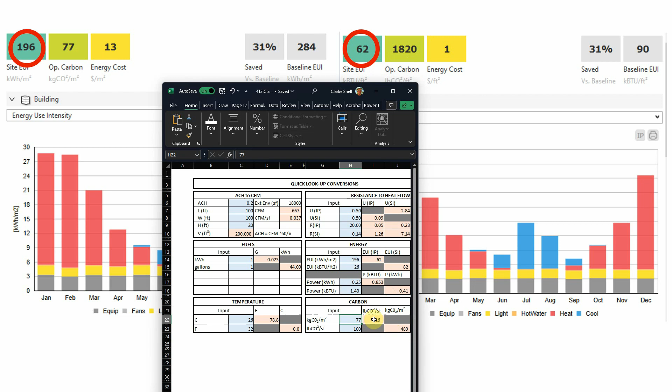Kilograms to pounds is, we're multiplying here by 2.2 in the numerator, and then meter squared to foot squared is 10.76 times to get the feet squared. That's in the denominator, so it's like 0.2 or something, but it's a smaller number. All right, so we need to be conscious of that.

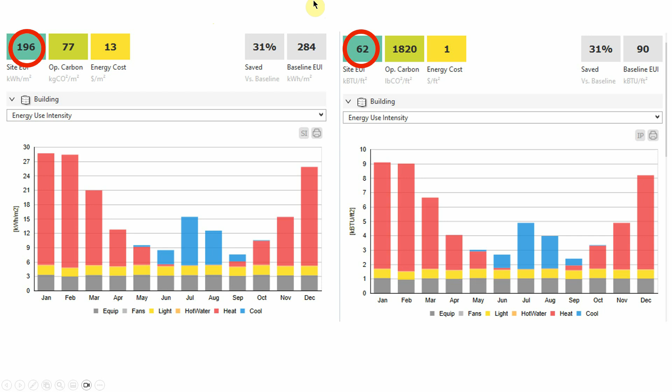And so then what I'm saying is we should just use the metric. And I've created a spreadsheet that will convert for us, so it should be straightforward. But just remember, don't use this value. And there's another value I found like that.

So we'll just have to keep our eyes open. Okay, so let me go back to the slides.

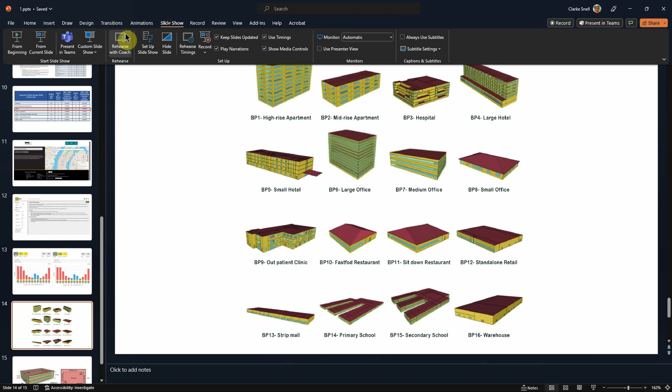So what's our benchmark for this? There's a new law in New York City called Local Law 97. I've mentioned it before, and it creates very stringent carbon emission standards for any building. We'll talk about the specifics in a second, but let's remind ourselves why carbon.

Unless you've been hiding under a rock for a while, it's climate change, and there is no debate about it. And it's pretty well established that a lot of this crazy weather is climate change connected. But the basic science is so straightforward that it's kind of laughable that there's people that might still debate it. I think they're all politically motivated.

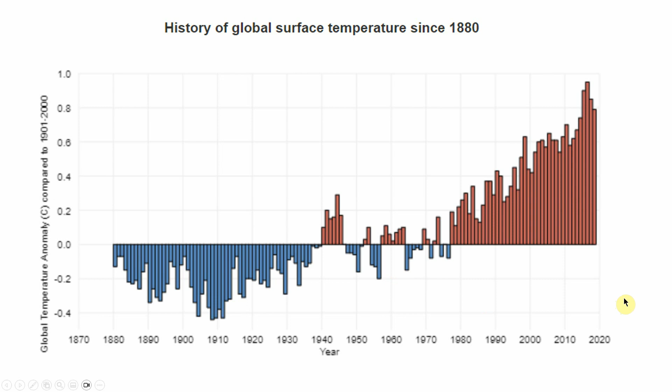There's thousands of peer-reviewed papers we can read, but this is why we have this law, and you can't disagree with it anymore because it's just the law. I don't mean you, but I just mean this is just what we have to do. This is the standard of care now. This is legal design. So this is the law, Local Law 97.

Basically, what it says is that any building in New York City that is 25,000 square feet or more, and that means that's already built also. So if you own a building and it's just sitting there, and it's 25,000 square feet or more, you fall under Local Law 97, which starts next year in 2024. And there are carbon emissions limits. So TCO2e per square foot is tons of carbon dioxide equivalent per square foot.

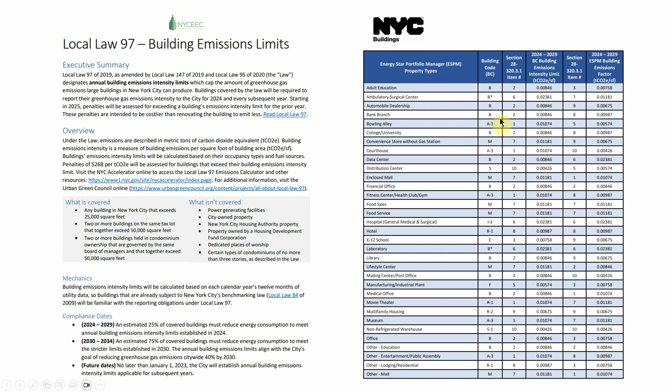An equivalent is taking into consideration other greenhouse gases, like methane, for example, which has a much higher effect on temperature than carbon dioxide, but we're putting so much more carbon dioxide into the atmosphere. It's really the main one we have to worry about. If we don't fix the carbon issue, the rest of it's moot. And then there's two parts to this. Well, three parts really. One is, so we have it in the building code now.

I'm not sure why my mouse is locking up. It's always the way, right?

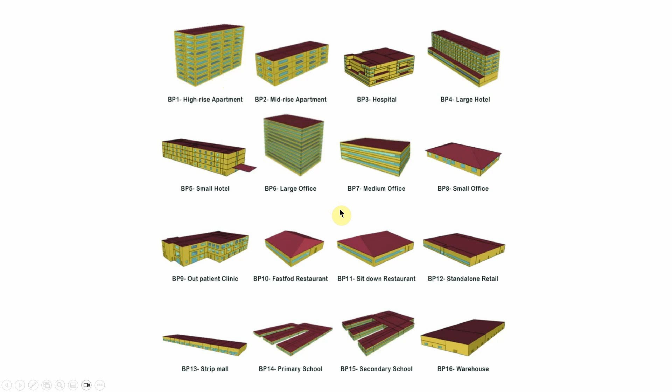We have emission intensity limits per square foot based on building types. And these building types are those DOE building types that we discussed at one point in these videos. We've been dealing with the medium office for the models that I've been giving as an example. I also did a mid-rise apartment building. We were dealing with one apartment in a mid-rise apartment building. But anyway, so these are the benchmark.

Actually, I'm going to confuse you there. Those are the DOE prototypes, and they're represented in this column. If you were using the Energy Star Portfolio Manager website and tool, you would have a different set of values than what we're going to use.

We're going to use what's straight out of this document, which I'll share with you. For example, the office we've been doing uses the DOE categories and code categories, which is what we're used to in terms of egress. A3 is a museum, B is an office. For what I'm doing right now, I'm going to use the B number.

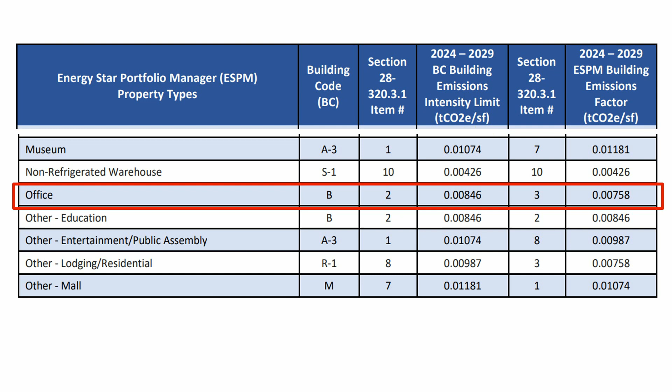It's 0.00846 tons of carbon equivalent per square foot of building space. So I have another page on my spreadsheet with Local Law 97 inputs. Let's talk about this briefly.

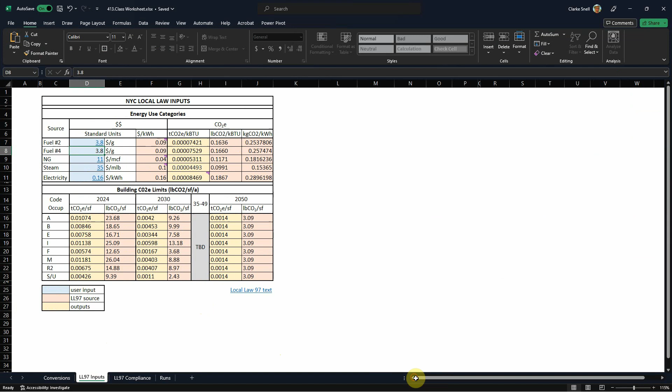First, we have the energy use categories: fuel oil number 2 and 4 as examples, which are common in certain types of buildings. Natural gas is the NG, steam would be district steam, and electricity. These are used both for plug loads, like whatever you plug into an outlet, but also heating, cooling, and hot water.

We obviously want to keep track of the cost of these things, and we can do that as part of this calculation. But the other thing is that each of these fuel types has a different carbon equivalent, essentially a calculated amount of carbon per unit of energy, measured in kilowatt hours or kilobtus.

Why is that? Electricity, for certain reasons, we're trying to switch over to more, partly because we can make it with solar photovoltaic power, which is very low carbon. But this energy source has a downside if produced centrally at a power plant, because there's a lot of energy loss getting it to the site—you're often burning coal to turn a steam turbine to produce electricity, and there's a lot of friction and other losses in that production process.

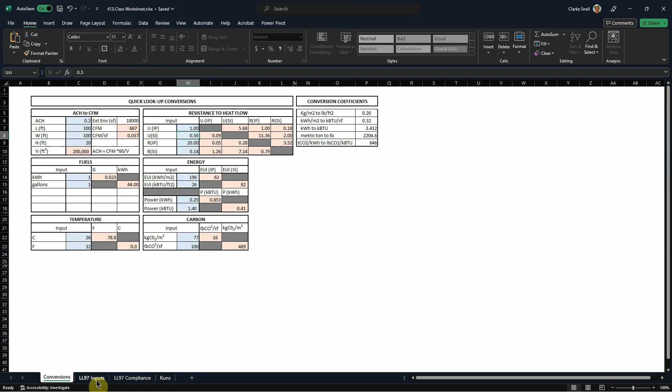Even if they aren't locked, the idea is I'm color coding: blue is where inputs go, yellow are outputs, and orange is sourced from the code. It's really very straightforward—you're just plugging in a couple of numbers, but I wanted to give you the background. We have to identify the fuel source so we know how much carbon it has per unit of energy.

Then we have different allowances for carbon per square foot based on occupancy type. For example, a museum has a higher use allowance than a business. This again is in tons of carbon per square foot.

And finally, the standard is going to become more and more stringent as we move forward towards 2050. Essentially in 2050, the goal is to be carbon neutral. So we can design a building in 2024 that meets the requirements for 2024, but it would fail in 2030 and 2050. We have to be thinking about the future as we're designing now.

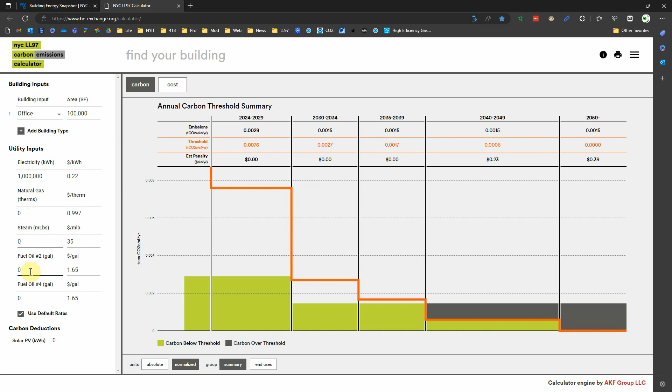One of the strategies here - let's look at their sample building. Remember, these are just the code building types, which are going to set these threshold values internally based on the square footage. So this is just a little spreadsheet that's got a nice user interface and output.

If we look back at our spreadsheet, natural gas has by far the lowest - actually, not steam, I'm not even sure if this is right. I'm going to check into it. I really think natural gas is lower, but anyway, maybe not. Whatever, I'll check this. The point is, fuel oil is definitely higher than natural gas, right?

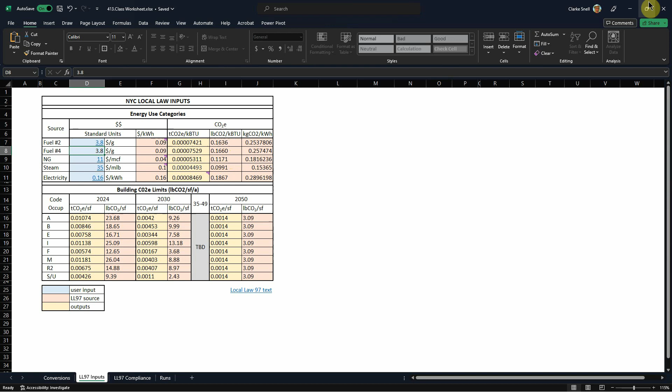So your first strategy might be to try to get any fuel oil use into natural gas, or maybe you would take some of your electricity and get a natural gas boiler rather than an electric resistance water heater. So a lot of the work can be done just by adjusting your mechanical systems and making them more efficient.

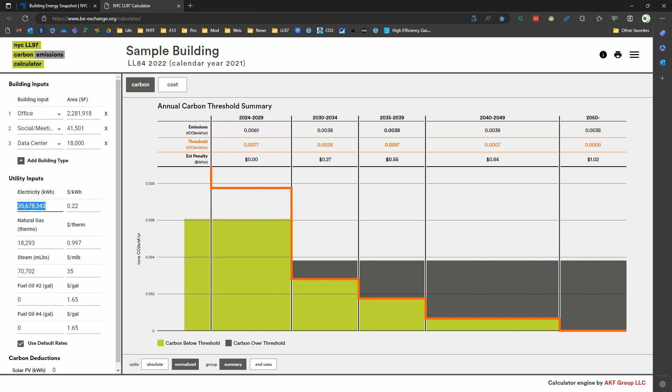The issue we have is that we don't have energy bills - we're designing a new building, so what we have is our outputs from Climate Studio. We really haven't looked at that yet, or not very closely, or not in a while. Let's go to my thermal analysis tool, edit one of the zones, and go to settings.

We see here that under carbon and cost factors, we have a variety of carbon dioxide categories: heating CO2, cooling CO2, hot water CO2, and electricity CO2. Why would we have these? It's because if we define a specific kind of heating system, it's going to maybe use fuel oil or natural gas, whereas if we have a certain kind of air conditioner, that's going to use electricity. So we'd want to be able to adjust these numbers based on that.

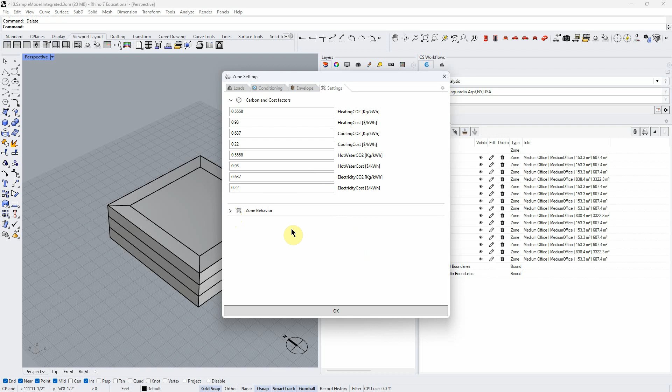And the cost, we want to be able to adjust based on real world numbers, which are changing all the time. By the way, you can just skip this zone behavior stuff. These are going to be presets that are beyond our skill level to change. So that's where we are getting the carbon and cost numbers that are in our results.

So the site EUI generates the carbon number based on saying, oh, well, you chose this kind of heating system, so we're going to say that that's natural gas or steam. We don't control that. So this is not a super detailed energy model, but we can mess with it by how some of the mechanical settings we change. Like if I set my heating system to a COP of 3, that's definitely going to be an electric system, and I'm assuming that this model understands that and will put that in that category.

Regardless, we're just going to take our carbon number straight from this. We don't have any energy bills. We haven't built this building, so we're just going to take these numbers and use them as our inputs for our benchmarking to see.

Our goal is going to be to design a building that meets the local law 97 requirements, so it would be legal in New York City, which is where you guys are designing your studio project.

So then, let's do that. Here I have created a spreadsheet for us to use for this purpose. It's pretty much completely automated, so it's pretty straightforward to use, and let me show you how to do it.

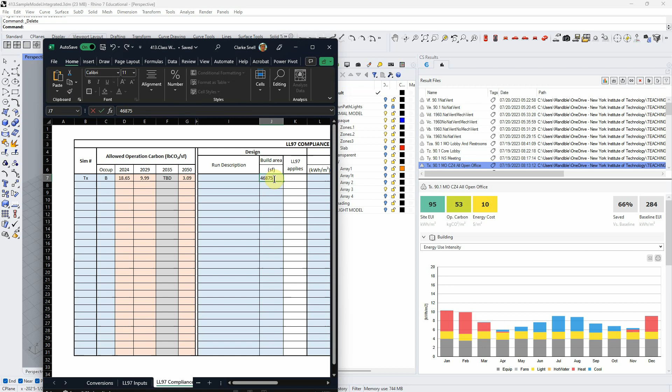Okay, and now I'm going to the building area. I can't remember, I think it was 46,875, something like that. I would go ahead and put in this name. And what this is saying to me is this is a 90.1, so an ASHRAE 90.1 standard building, medium office in climate zone 4, and all these zones are set to one use type, all is open office. So I'm going to put that in here.

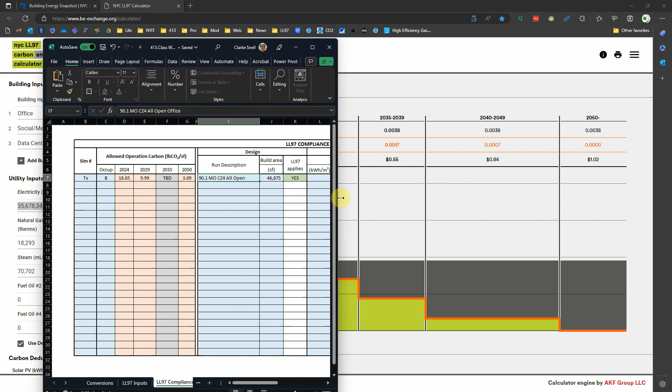So what happened when I did that? As soon as I put in this value, let me delete it. If I put in a value of, let's say, 24,000, we can still run this, but it's not Local Law 97 applicable because it's below 25,000. But if I put in my 46,875 or whatever it was, then this does apply.

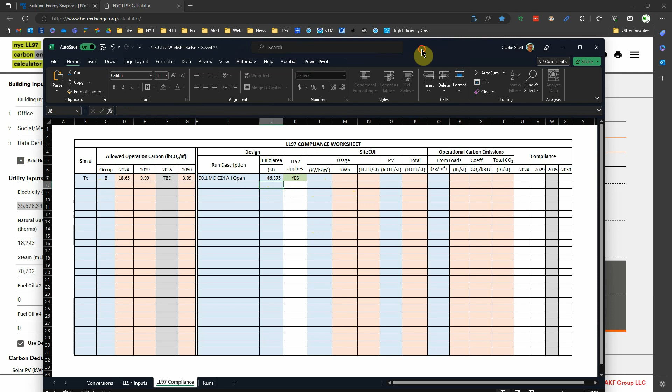Now all I have to do is, and again, I'm just inputting into the blue cells. So what do I want to put in there? Let me get this out of here and leave that there. Okay, maybe I can just do this.

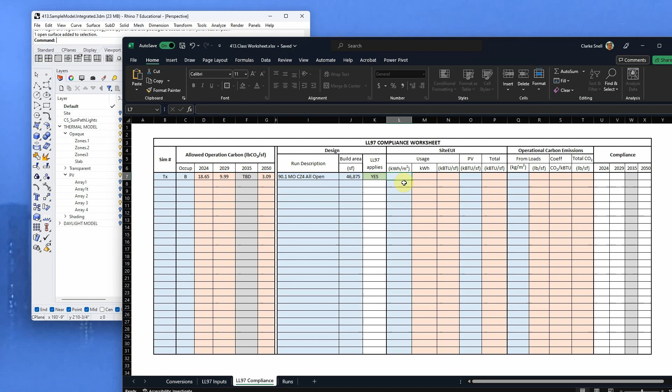I want this full size. Okay, so I've got 95 kilowatt hour EUI and 53 carbon kilograms per square meter. Anyway, so what was it again? 95, 53. Okay, so I'm going to put in my 95 EUI, hit enter. That populates. So now I have a total kilowatt hours.

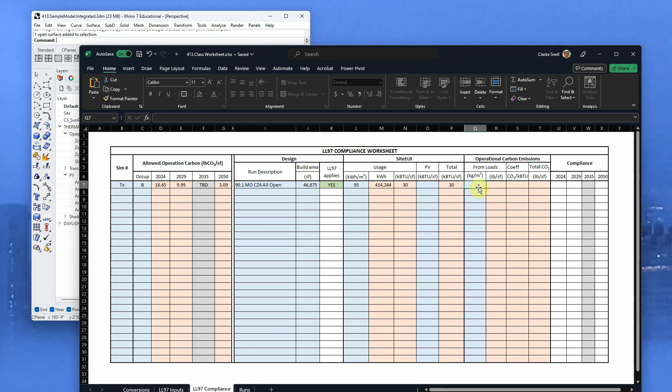So if I need that for something else based on my square footage, now I've converted to kBTUs per square foot. And PV we're going to add in later, because remember we calculated how much PV we might be able to produce on our roof. And the total is going to be this minus this. So we'll see the total amount of energy that we're using if we have some PV to replace some that we're buying. And then what was the carbon? Was 53.

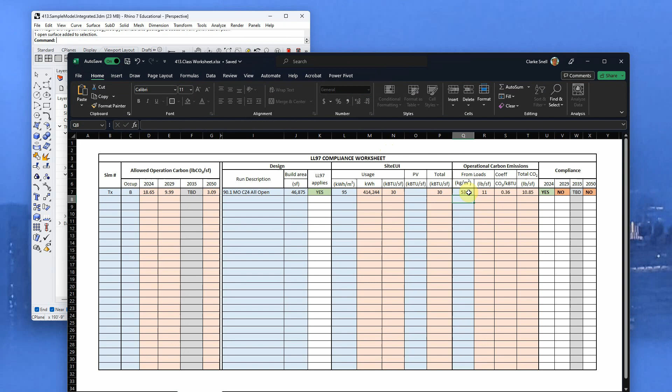And so we see that this design, whatever it is, is going to pass in 2024, so that's good. But then in 2029, it's already not passing. In 2050, we're definitely not passing. But what if I then could make the 26 kBTUs per square foot of PV power? Then I am passing in all three. So that's the process. We get our loads as low as we can get them, and then we bring the PV in and see if we can have a total usage on site that gets us to pass.

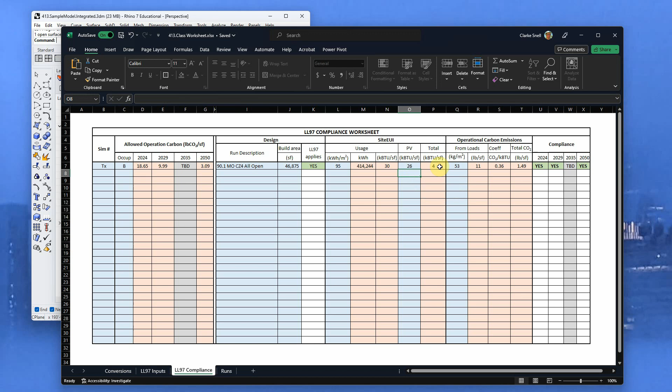And so I can just keep doing that. Let me do one more. Let's see, is that any different? No, it's not. This is it. So this one looks like I have the same settings, but I made some of the zones a meeting instead of an office space. Oops. Okay. And these settings will be the same. So this is a drop down, by the way. You can select whatever occupancy type you want, and it will populate automatically. If anybody wants to learn how to do these things, we'll be happy to teach you.

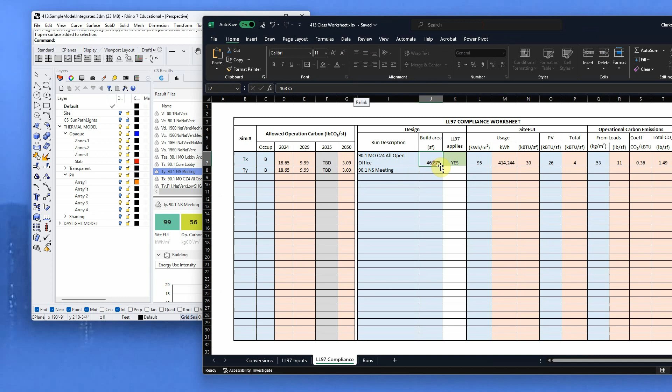It's the same buildings, the same square footage, and we're at 99 and 56. So that's probably about the same, right? Yep. So we're the same situation. Probably if we add our PV, yeah. So this building's in good shape if we add PV, and so that would mean we'd be making the argument to our client that we wanted to be planning for PV, and we're at the beginning of the project, so that's a possibility as opposed to waiting to the end.

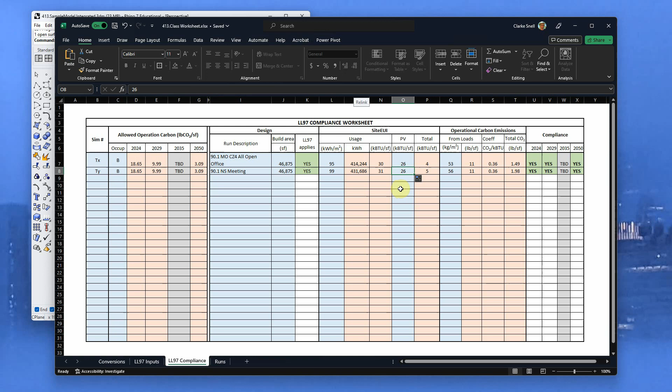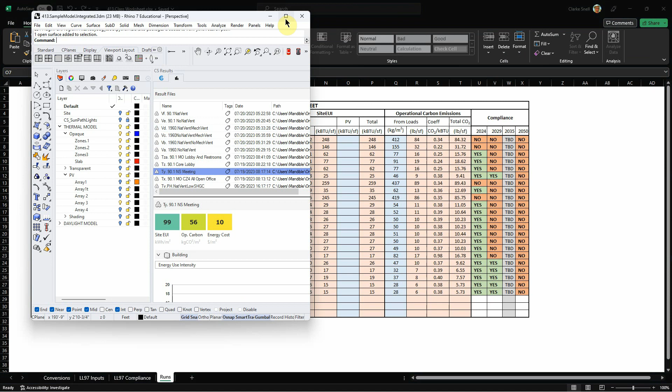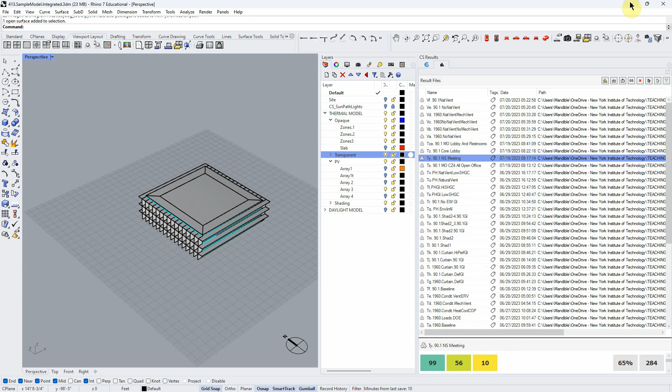So the last thing we're going to do on this, let's just look at all those runs that I did. Remember, this was that building. It had a bunch of funky shading, had this glazing set up, and then I ran just a ton of different simulations, starting with a 1960s envelope with an old school mechanical system. And so this is the results. And we can see that a 1960s building is not going to make it.

Once we start upgrading the mechanical system, okay, so again, now we're thinking about maybe the Guggenheim. We really get to work on the mechanical system. We might be able to at least buy some time to get to 2029, and then it keeps going. And that's before any glazing. So let's see, the 1960 with the default glazing and the decent mechanical system. No way, nothing's working here. If we improve the glazing, still not going to work. So we'd have to do a lot of work on the Guggenheim to figure out how to make it function.

But these more contemporary buildings are doing pretty well, right? Once we get to the 90.1, we have windows and we can have shading, and then we're passing at least for the current year. When we get down to the passive house stuff, where we have a better envelope and lower infiltration, natural ventilation, we're in compliance at least through 2029.

And then if we just add our PV in the whole way, we see that PV just would not have been of much help to the 1960s building, but it helps with a lot of these. So if we get our loads down with a decent effort, we can add photovoltaics according to this model and pass and build a Local Law 97 compliant building and save the world from climate change, and not get sued.